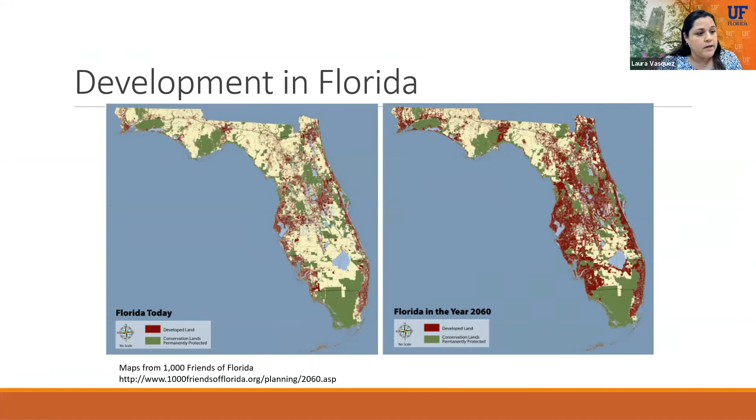Again, in Miami-Dade our water comes from the Biscayne Aquifer. It starts here at Lake Okeechobee and runs underneath the ground, and there are about 3 or 4 counties that share that same Biscayne Aquifer — I think it's part of Palm Beach, Broward, Miami-Dade, and Monroe. We send water to Monroe, and we ship water to Miami Beach and also to Key Biscayne.

So that's important because if we're not able to refill the aquifer, then we have issues with water, having the availability for water for us to use to drink.

In Florida, we have about 50 to 60 inches of water, which is about 4 to 5 feet of water. So this, sometimes I always have this question, well, why do we need irrigation if we have so much water or so much rain every year?

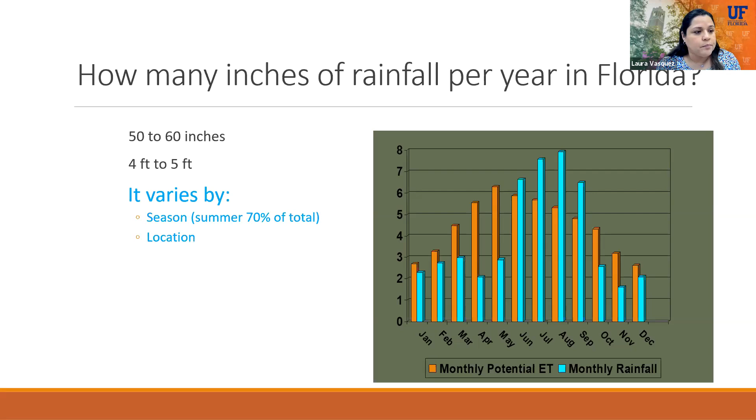Typically, we do very well in the winter. Lately, it's been raining. Even the last couple of days down here in Miami, we've had some rain. But our worst month is in April. So right before the rainy season is when we end up dealing with a lot of drought issues.

Last year, the South Florida Water Management District did determine that we were in abnormally dry conditions near Miami-Dade County. So this is when we have most of the clients coming to our program because their landscape is showing signs of stress.

But if you're watering your grass or your landscape appropriately throughout the year, your turf and your plants will overcome the drought situation a lot better if you're watering appropriately.

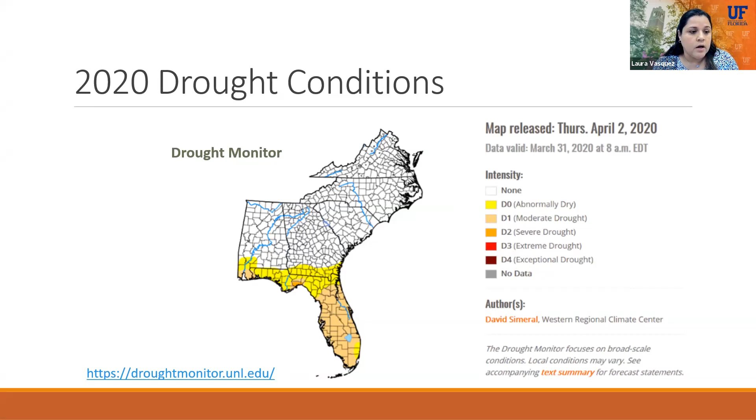Again, this is an issue that happened last year. They do end up giving us stricter rules when we end up in drought situations. Here, they actually changed the time that we were allowed to water during the month of April.

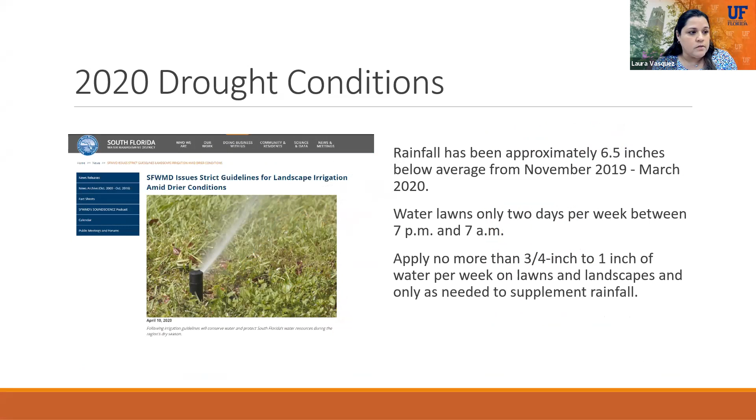But all this can be compensated, if, like I mentioned, we're doing the right practices or using best management practices with our irrigation systems, then that's something that we shouldn't have to be too concerned about.

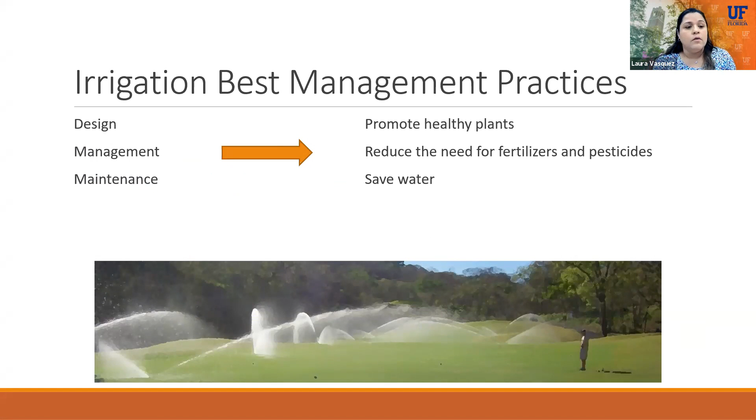So the 3 things that we're looking at is design, management, and maintenance of your irrigation system. These 3 things will help you promote healthy plants, reduce the need for fertilizer and pesticides, and it's going to save you water in your landscape.

We're going to go a little bit into each type of sprinkler. What I want you to note is the amount of water or inches that these sprinklers put down. So these are your typical sprays, which you should use in your bedding plants, and those typically give about 1 to 2 inches per hour. They are affected by the wind and evaporation.

Your rotors give about 1/2 inch to 1 inch per hour. These are more efficient. They do have larger droplets, and they're used predominantly for turf areas.

The issue here in Miami-Dade, when we go out and do irrigation assessments, is that we typically see both of these sprinklers in the same zone or in the same section. And why is that a problem? As you can see, if we go back, your sprays again are giving 1 to 2 inches per hour, and your rotors give about 1/2 inch to 1 inch per hour.

So what happens when you have those 2 in the same zone? You don't have equal application rate, right? So one is giving more water than the other. Typically, your rotors need about 30 to 40 minutes to put down a good 1/2 inch. And if you're running your sprays at the same amount of time, you're gonna be applying too much water where your sprays are located.

This is a multi-stream nozzle. These apply water very similar to a rotor. Their performance is more efficient, also with low pressure, and they have less wind deflection.

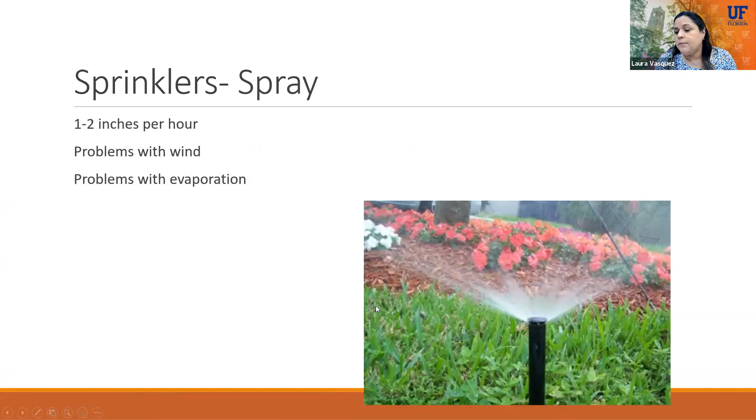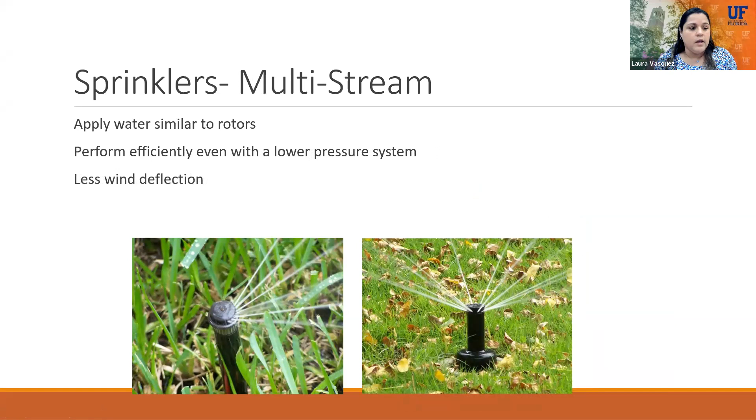The reason being is because these apply water similar to a rotor, so it's good to have them in the same zone if you know that it's a cost-effective way to replace the sprays in your irrigation system.

Micro sprays, we put this in here. Typically, these are not seen a lot in home landscapes, except for maybe your vegetable gardens or in your orchards. But it's important to point out that micro sprays give out gallons or inches per hour, so they apply differently from your spray and your rotor. When you have them in the same zone, you have to remember that they're giving out different gallons per minute as well.

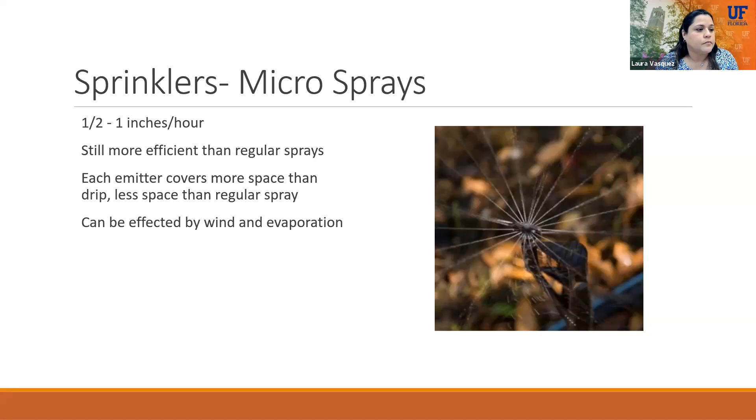So this is your typical drip. A lot of contractors or landscapers, especially down here in South Florida, are not too happy with homeowners installing drip, because if you are using well water, they tend to clog. But we recommend drip to be used more as a temporary irrigation. They're more efficient because they're giving water directly to the root zone of the plant. It also does gallons per hour instead of gallons per minute, which is what your sprays and rotors give. They do have issues with clogging, and again, it's temporary irrigation. If you're using plants that do very well in your climate or county, they should be well established once you get the drip in and water them with it, and then you're able to remove the irrigation, and they should do well in your area if you're using the right plant in the right place.

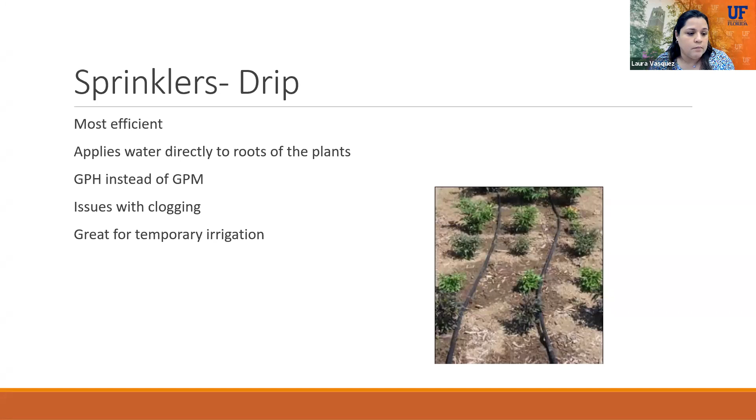So drip versus soaker. These we tend to see a lot in landscapes, and there is a big difference. Your drip, like I mentioned before, gives water directly to the root system. Your soaker kind of sweats throughout the entire length of the tube. But when the pressure is really high in your system, it gives out a lot more water than what's indicated on the manufacturer specification. So it's important to know how much pressure is running through the system so that you know how much water is coming out. The drip is a little bit more efficient, I believe, than your soaker hose.

Pressure regulated spray heads - Dr. Dukes has done research on pressure regulated heads. When you install these bodies or body types in your sprinkler system, they tend to keep the pressure regulated throughout the zone, which allows for water saving. Based on his research, testing the pressure regulated spray sprinkler bodies resulted in a flow rate reduction of 10 to 24% at 1.5 gallons per minute. So it's important to have the bodies of the sprinklers regulate this throughout the entire zone. The more sprinkler heads you add in your zone, the more you're reducing the pressure in that particular zone. These heads will allow you to keep the pressure regulated throughout the whole section.

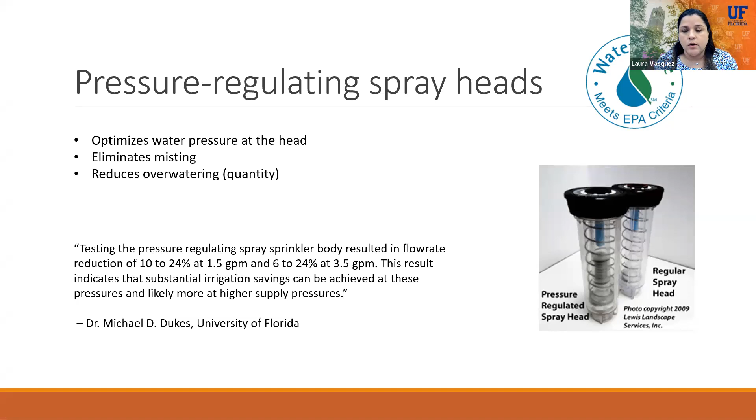So what's wrong with this picture? Now that we've talked a little bit about it, can anybody tell me, maybe in the chat, what's wrong with this photo based on some of the things we talked about in the previous slides?

Yes, overlapping sprays is one, because they're watering the same section - mixed sprays, overwatering, overlap, watering sod and trees. Yeah, that's a good point. There's mixed plantings, and different kinds of heads. So again, different head output in the same zone. Exactly, Terry.

So what we're looking at here is that the rotors and the sprays have different application rates. If you're running this area to water the grass for 30 to 40 minutes to get a half inch, which is what Dr. Dukes and the university recommends - half an inch of water every time you water - you're going to run this for 30 or 40 minutes to get the half inch in your grass. But these areas where you have these sprays could give out double that amount, and it's also overlapping and watering the same area. So you don't want to do that. You want to make sure that you have your sprinklers watering the area that's needed.

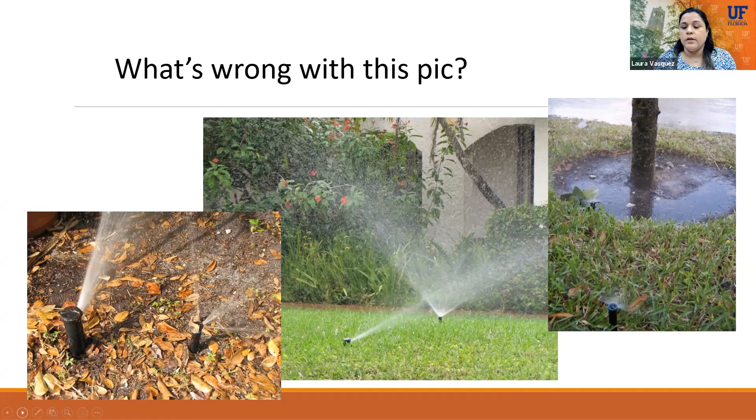Okay, so here's another review question. Can somebody tell me what's the difference between your spray here and your drip irrigation here? What was one of the biggest differences between your sprays and your drip or soaker hose? Output, correct, Stacy - output amount. Again, we're talking about gallons per minute versus gallons per hour. Smaller droplets, that's true - the sprays have smaller droplets, so you have more wind deflection. Drip is more efficient; it's giving water directly to the roots.

The main point is that you have different amounts of water being given out per minute versus per hour. If you're using sprays correctly in your bedding plants, which you should, and run them for about 10 to 15 minutes, these heads can typically give out 3 to 5 gallons per minute, which should be sufficient for that area.

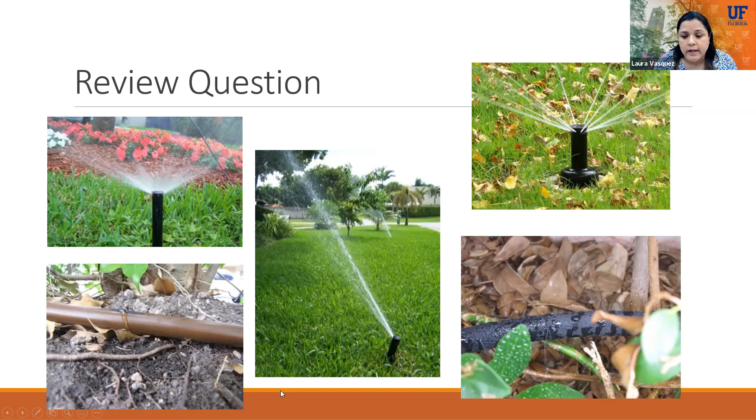However, if you have drip in the same zone, these give out gallons per hour - maybe 1 gallon per hour, or 3 gallons per hour. So then we're going to have an uneven application rate within the system. It's important to know what type of sprinklers you have, how much they're giving out, and at what rate they should be performing at their maximum.

Irrigation zones should be based on plant types - as we mentioned, these are called hydro zones. Your grass should typically be on its own section since it needs the most water. Your shrubs, trees, and ground covers, once established, don't need that much water. Maybe in April here in South Florida, during a really dry season, it's important to give them just supplemental irrigation. But if you're using the right plants in the right place, and plants that are Florida friendly, they should be able to deal with drought conditions, especially a mild drought.

Another point to make is when you're installing or designing your irrigation system, you need to look at what you're watering in that particular area.

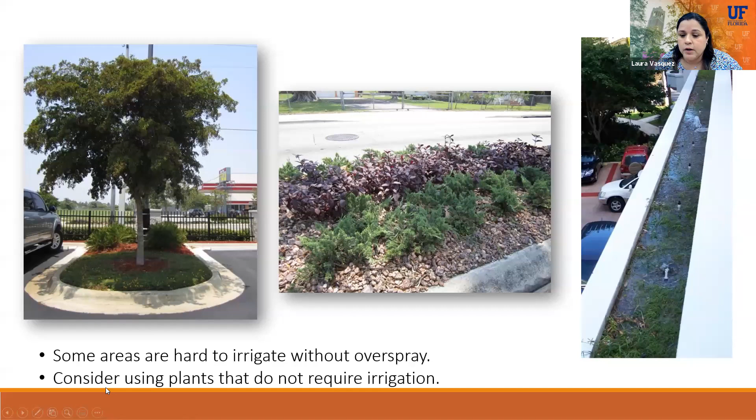So it's important to know: do we need irrigation here? Are there plants you can put here that could be established with just a drip system, where you tie into maybe one of the heads, run a drip line, get them established, and then you don't have to worry about watering that area. Some areas are hard to irrigate without overspray, so consider using plants that do not require irrigation.

Also, another great point - when designing your irrigation system or making changes to it - is to make sure you have head-to-head coverage, meaning the water from this sprinkler should reach the other on the other side and vice versa. You should have an overlap of water within your sprinkler systems, because this provides better uniformity in your system.

You could do triangle spacing or square spacing, and you want to make sure you have matched application rates throughout the zone. So if this section uses heads putting out 3 gallons per minute at, let's say, 30 PSI - because that's what your system is pushing out in that zone - all the heads here should be comparable. They should be the same type of head, just with different patterns if needed. If an area only needs 180 degrees instead of 360, the patterns can differ, but making sure you have matched application rate is very, very important.

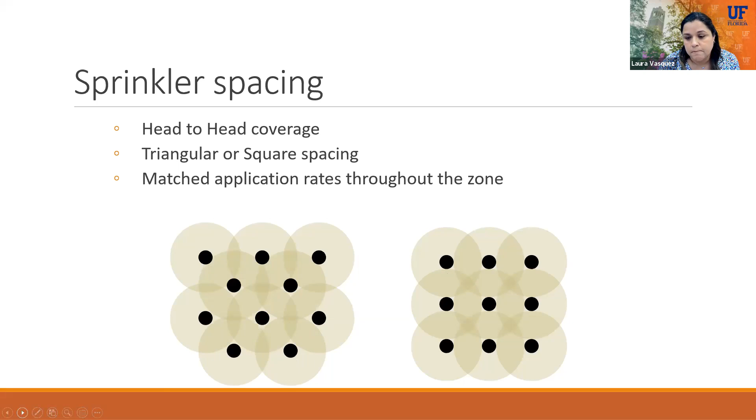Sometimes when you have a broken head, you think, oh, I have a spare in the garage, or your landscaper says they have one in the vehicle and just replaces it. Sometimes that can cause more damage because it could be a head that's not suitable for that area. So it's very important to know what head you're replacing in that particular area.

So what we want is a uniform system, or uniform application of water. These are just different examples.

This happens when you don't have proper spacing or you have maintenance issues. You have plants that are receiving the appropriate amount of water, but then you can have a plant here that's not receiving enough. That could be due to uniformity, design, or maintenance. What we're shooting for is to have adequate irrigation in the root zone of your plants.

So if you're watering 2 days a week, at least in South Florida, and you're shooting for that half inch every time you water, that should be sufficient for your plants and even your grass. A lot of homeowners don't believe us when we tell them that should be enough for your grass, but it is basically enough. It will be enough for what your grass needs.

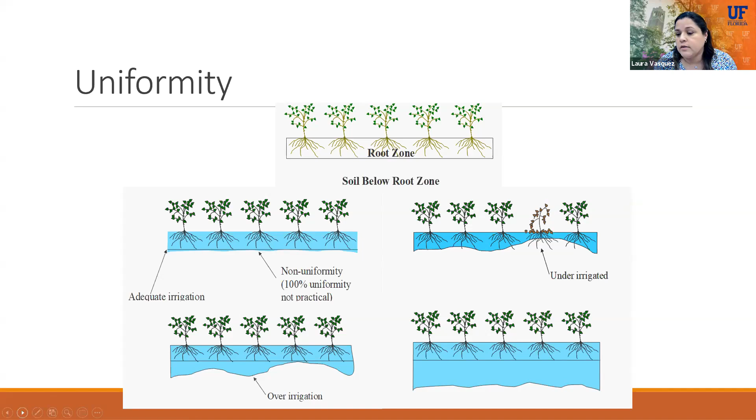So this is just an example of bad design. Typically, some homeowners will see a dry spot, and instead of checking the irrigation system, they just put more time on that particular zone. I've asked this question to many homeowners: when you see a dry spot, what is it you do? It's like, well, I'll go to my controller and just give it 10 more minutes because I know that area is dry. But it could be a bad design issue.

Here's an example. It could be an issue with uniformity because of pressure, or you don't have enough pressure in the line. This is a study that was done at the university showing the issues you have when you don't have enough pressure and the areas are dry, and when you don't have head-to-head coverage.

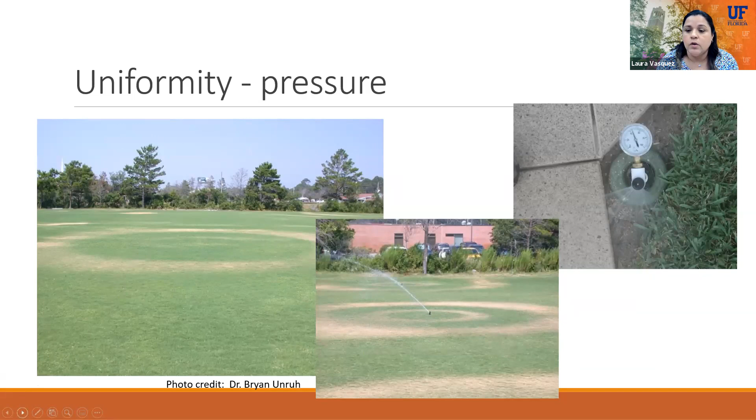The other issue could be with uniformity, or could be maintenance. A lot of times your sprinkler heads pop up, and sometimes they don't pop back down. So your landscapers come with the mower, and instead of pushing the heads down before running the mower, they just run over the sprinkler heads. A lot of the mowers or landscapers don't want to get off the mower to push the heads into the ground, and that starts to cause a lot of issues with maintenance.

So this area here that's dry is caused by this sprinkler that's not properly applying water because it was damaged during one of the routine maintenance visits.

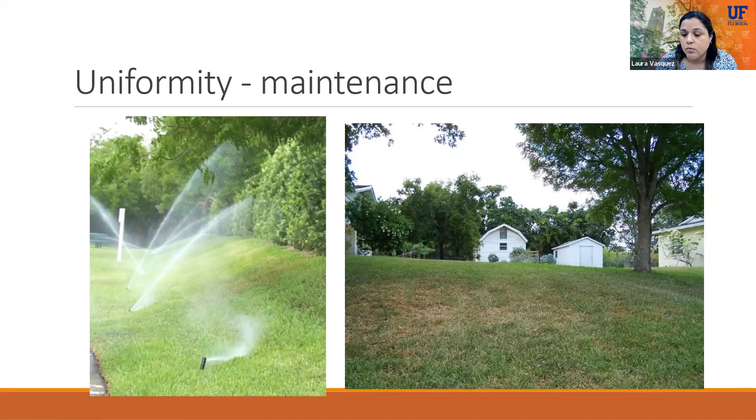So the important thing there would be to always try to do a wet check. Before you decide to turn on the irrigation system, or before you decide to turn up your irrigation system for more time, it's always important to do a wet check. You want to turn on the irrigation system, walk the zones, and make sure that you have proper coverage. How you can do that is by doing this typical or basic catch can uniformity test.

This test will give you two pieces of information: one, whether your system or layout has uniformity, and two, your application rate. If you don't have any cans, and you have cats or like to eat tuna, you can save the tuna cans or cat food cans, and place them within an area, ideally near 3 or 4 sprinklers, and run that zone for about 15 minutes.

After those 15 minutes, you're going to go back out and measure the water in each can. You can either use a ruler, or if you have a beaker or measuring cup at home, you can measure how much water you're getting throughout the system in that particular zone. If you have more water in one area, closer to the sprinkler, and not enough water on this side, it could be an issue with head-to-head coverage. You see here, there's only one sprinkler on this side, so you're going to get more water here versus on this other side. So you would see that you don't have uniformity in the system.

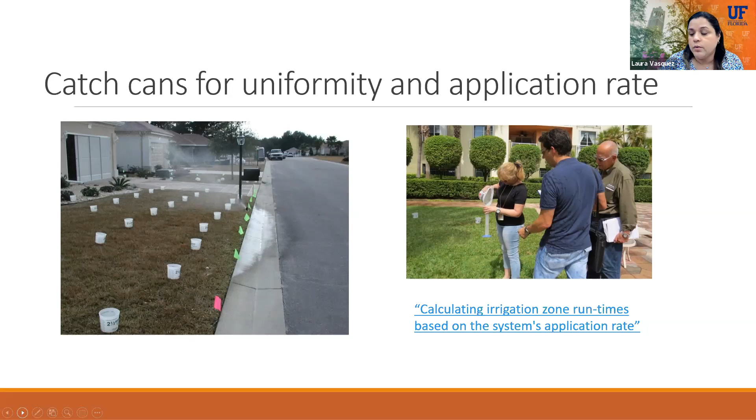This test can provide you both pieces of information. We have a YouTube video filmed by Michael Gutierrez, who now works at Broward County, and Mary McCready put together this video that can tell you how to calculate your run times for your irrigation system when you're doing a catch can test. I'll send that link out for you to watch as well. That will help you out.

So irrigation management, what's important to know? Well, you want to know the system, you need to know your plant requirements, application rate is important, and routine maintenance. Everything needs maintenance, even a Florida-friendly landscape needs maintenance. Having a Florida-friendly landscape doesn't mean having no maintenance, it's just low maintenance. Everything needs maintenance, even your irrigation system.

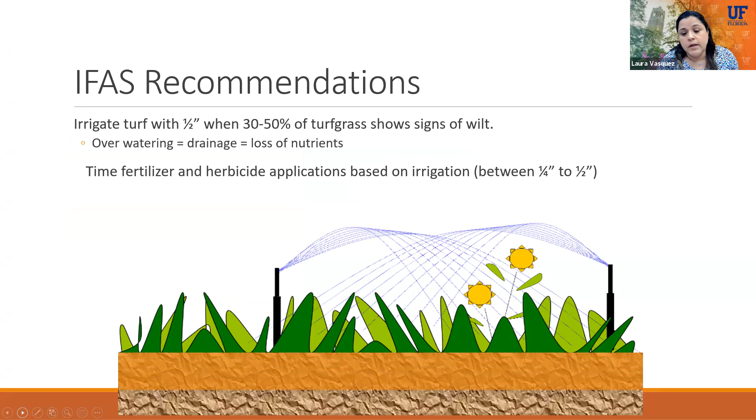Based on IFAS recommendations, you're looking for that 1/2 inch of water for your irrigation system. When 30 to 50% of turf starts to show signs of wilt, you want to make sure you're giving it that good 1/2 inch that it needs. It's really important not only to calculate the irrigation time based on that 1/2 inch, but also to know the soil type of where you live.

In Miami-Dade County, I'm in Homestead. The soil here is very rocky, very loamy. So you wouldn't program your irrigation system the same amount of time in Homestead as you would in North Miami, because North Miami has sandier soils. In Cutler Bay, just east of us, they have very mucky soils. You have to understand the water holding capacity of your soil, so you're not going to run your irrigation system for the same time down here as you would further north, because the soil doesn't hold the same amount of water.

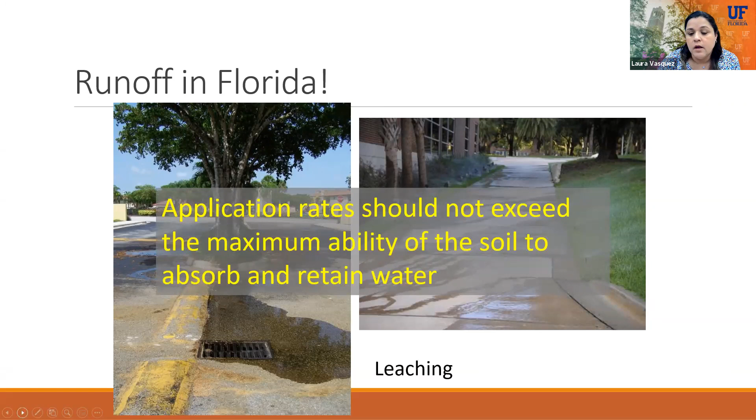Leaching is very important. It's important to know how much water your soil can hold before it starts to run everything off, because there is no filter from our irrigation systems running into our drains and out into our bays and our drinking water. So it's important that you're applying the appropriate amount so that we don't have major runoff.

So what are other ways to determine your application rate? You can install a smart controller. That would help you with your application rate. We'll go a little bit into that.

We have our FAWN weather station. If you have a basic digital timer, you can always use the FAWN weather station and put in all the information of your irrigation system, and it will send you a report with current rain conditions on how you should be running that irrigation system.

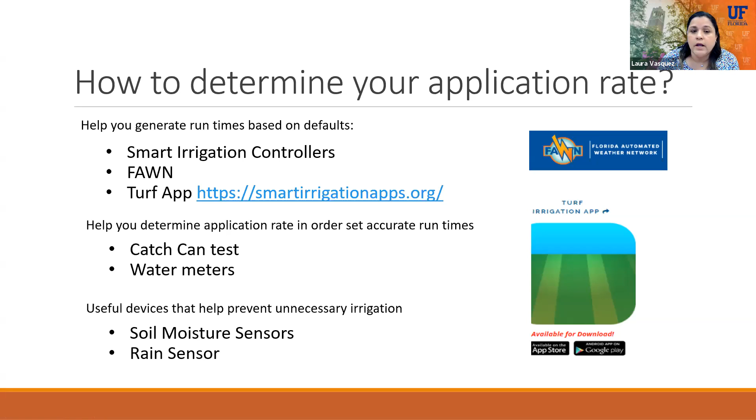The university also has a turf application you could use, which you can download on your smartphone. Again, we talked a little bit about your catch can test. You can use your water meters; if you have a sub meter, that can help determine your application rate as well. Other usable devices are your soil moisture sensors and your rain sensors. We'll talk about a few of these in the next coming slides.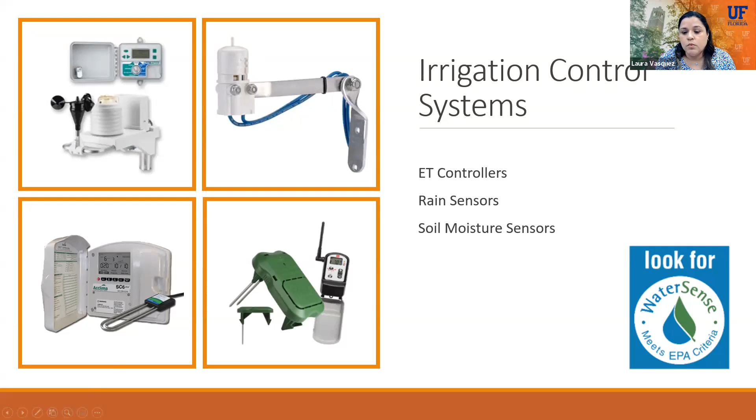These were our original smart controllers or ET controllers that came out, which are standalone units. They get the information of what's going on at that particular property in order to apply adequate irrigation run times. So it takes temperature, it takes information on how much it's rained, and it starts to calculate what it should be running that particular zone for.

But with everything going smart, we now have these smart irrigation controllers that run on Wi-Fi. I kind of like the older models where they're standalone units and tell you exactly what's going on at your property, because in South Florida, we have a lot of issues where, like, my mom would call me.

My mom lives like 10 minutes down the street from me, and she's like, oh, it's pouring down here. And I'm like, what are you talking about? It's very dry here.

So if these particular smart controllers get information from local weather stations - this one is your Rain Bird, and it has this link module that needs Wi-Fi access to read from the weather stations back into the timer, as does Rachio, Hunter, and these other smart controllers that are EPA certified. However,

we want to test them as well to see how accurate they are in South Florida. I know Dr. Dukes has done research with them in Gainesville. The other issue we've run into is actually having access to Wi-Fi. The larger properties have those issues because homeowners can tie into their Wi-Fi at home, but when we deal with large properties like homeowner associations and commercial size properties, like some warehouses down here in Miami that want to join our large property rebate program, which I'll talk about a little later, they have issues getting connectivity or getting Wi-Fi to that system.

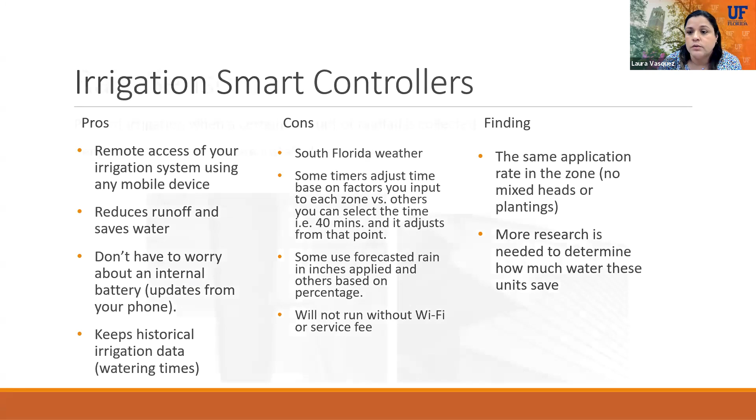So I talked a little about rain sensors - these are mandatory to have in your irrigation system, but it's also important to locate them in the proper place. You don't want to put them, say, on the overhang of your home where you're not getting any water. They need to be out in the open where there's no trees, nothing covering it, so you can get the rain and make sure you're not overusing your irrigation system.

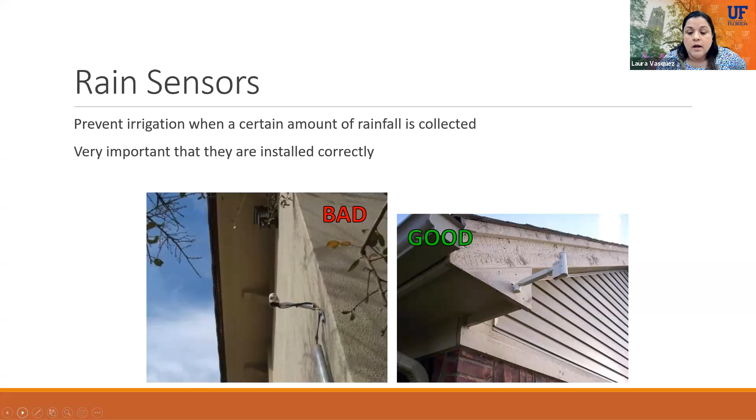The rain sensor will shut off the system - it will not allow the system to come on if there's that good half an inch of water in the corks inside the rain sensor. These now come wireless, which is great, because before they would have to run a long wire to your controller to make sure you could locate it in a proper location. But now they come wireless, so you don't have to worry about paying that extra money to your landscaper or irrigation contractor to install these, because they're wireless now.

So these prevent irrigation. They don't allow irrigation, but they prevent it from coming on. This is an old mechanical timer. This is still what we're seeing out there in a lot of the new developments.

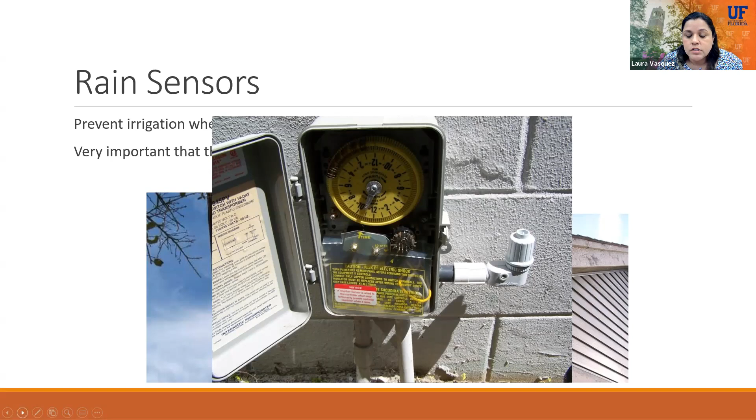Hopefully we can move over to requiring the installation of smart controllers with new development. I think Alachua County is working on that, starting some requirements for new development to have a smart controller versus these mechanical timers, which are a lot cheaper, and the developers don't want to pay for the smart controllers.

So we talked a little bit about soil moisture sensors. This is just a little rundown of how these work. You would put the soil moisture sensor in the ground in the first 6 inches of the soil. Again, they work similar to a rain sensor, but these are more effective because it's telling you exactly what's in the ground and in the root system of your plant.

So you install them in the ground. You would put a bucket of water over the soil moisture sensor so it can get a good reading of how much water it needs to hold in that particular soil. Then you get your rate of what your water holding capacity is.

In the morning, let's say you had a sunny day and it's been sunny for the last couple of days. The timer that you see here will send a signal out to the controller for the soil moisture sensor. And if it's really dry, then this latch will stay closed and it allows the water to come through the valve and out through your irrigation system.

However, if it's been raining and there's enough water in the soil, the timer will send a signal out to the controller for the soil moisture sensor, and it will not allow for contact in the irrigation system to run through the wiring and allow for irrigation. So that's kind of how these soil moisture sensors work. These are a lot more precise to me versus the rain sensor, again, because you're seeing what's going on in your soil in that particular property.

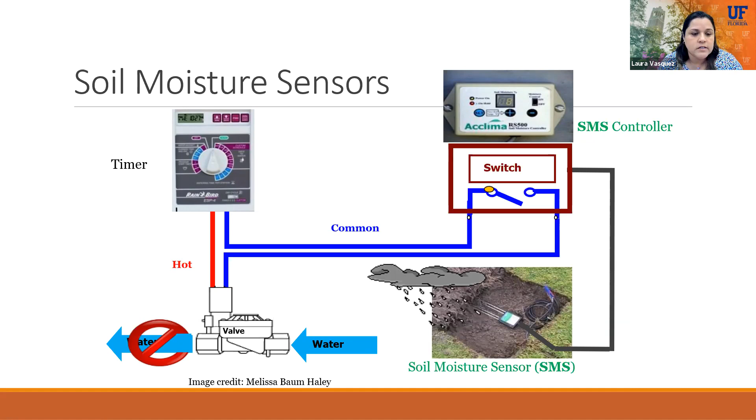Okay, Douglas says open fields, open area without trees. Brian, that's correct: turf, driest place in the landscape. That's right, in the driest place of the landscape. Why? Because if it's dry there, then you know that when the irrigation system comes on, it's going to be based on the driest area. So you're correct, thank you guys for responding. Equal distance between two heads... let me think. Yes, Terry, it is in the area that is the driest of the irrigation system. Basically, it would be best to have one in each zone to give you a good idea, but that's a little bit of an overkill if you're just doing it mostly for your turf. But definitely it would be in the driest area.

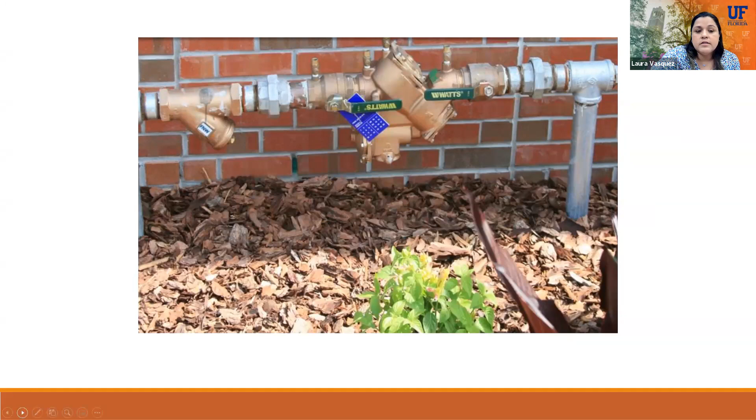This is a backflow preventer. These are mandatory in your irrigation systems that are well water systems, not potable systems, but for well water irrigation systems. You have to have these backflow preventers. These prevent contamination and going back into your well water.

For those of you guys that are working with electricity, it's very important. This happens a lot: every time we go out to look at valves, a lot of these electrical valves are flooded with water. You have to remember you're working with electricity, so it's really important that you guys are using these DBY connectors. They have grease inside these tubes so that you are being safe working with wiring if you're doing the work yourself.

Or even if you're going in there to try to turn some of these on, your indexing valve, which is the old valve that turns into your different zones—this would replace that indexing valve. But if your timer were to go out, you can turn on these electrical valves one by one to turn on your different zones. So if you're in there trying to turn one on by hand, you want to make sure that you're protecting yourself and not dealing with live wires.

Isabel said we have a lot of that on our community property. Yes, I can imagine so.

That's another reason why it's important to do wet checks. Yes, you're relying on your landscapers and your irrigation guys to do a lot of the wet checks and information like that, but it's good to be involved in what's going on. I know it's difficult sometimes, but just so that you can see that the wet checks are being done properly.

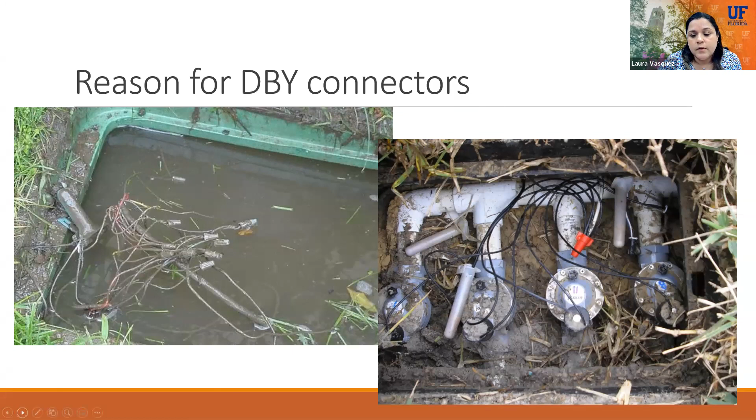Throughout your irrigation system, again, making sure that you do maintenance on your filters. A lot of the water, like I mentioned here in South Florida, we have a lot of calcium in our water, so it tends to clog up a lot of the irrigation system. And if you're not cleaning out your filters, that's going to cause an issue.

Typically here, whether you have municipal water, you really don't need the filter for that, but again, groundwater, surface water, we do have some people here in South Florida that use lake water or tap into the canals. And so that brings a lot of debris with it, and you don't want it to clog up your sprinkler heads.

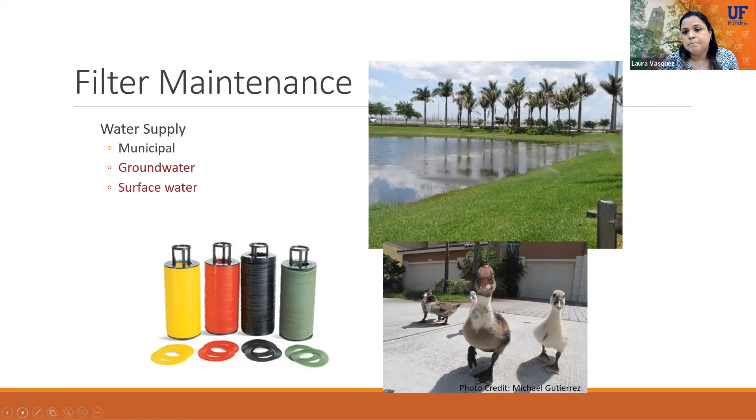So you want to make sure that you're using appropriate filters and making sure you wash them out. I've gone to a lot of properties where the filter, you can't even see the inside of the filter. It's completely clogged. So again, it's not serving its purpose if you're not going in there and washing them out.

Again, maintenance is a big issue. You want to make sure, again, if you have your company doing a wet check, it's important to walk your irrigation system. If you're a homeowner, just turning it on once a month, checking the zones, making sure that you're applying water appropriately and that you don't have any broken heads.

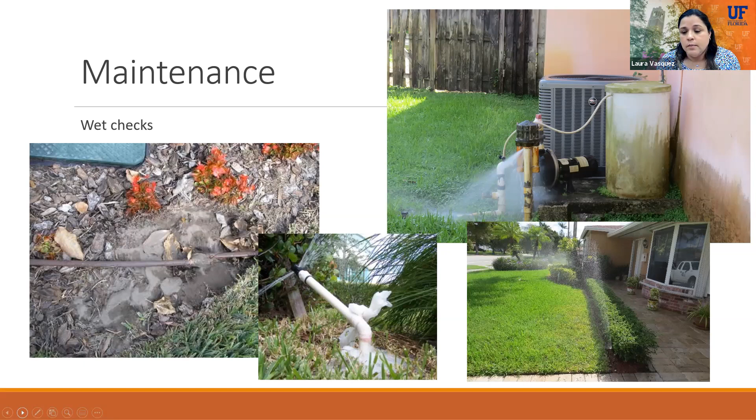Again, making sure that you replace or repair any broken lines right away. This happens a lot with drip, which is another reason why a lot of homeowners and landscapers are not too happy with drip, because if you have them above the ground, sometimes the landscapers come through, or by mistake you can run the weed whacker over it, and then you end up having a lot of breaks in the system. So it's important to do regular maintenance because it does save water, money, and your plants in the long run.

So I talked a little bit about us conducting irrigation assessments and going out and looking at properties. We have a program here called the Landscape Irrigation Rebate Program. Basically, we have homeowners who sign up for our program. We have a program for large properties and also single family homes. These single family homeowners sign up to the program, and we go out and do an assessment of the irrigation system.

We take a look at ways that they can make the system more efficient, and then we send them a free report. In that report they can review the findings. We will do a walkthrough with them on site and also talk to them about their plants and how the plants and irrigation work together. Once we give them the report, they decide what changes they'd like to make, and they can get a rebate of up to $500, depending on what they change in their irrigation system.

For large properties, their rebate is up to $2,850. But the stipulation for that program is that you have to install a smart controller. You can't do anything else if you don't install a smart controller into that irrigation system. I wanted to show you all the different counties that already have this type of program. They're not all the same. It all depends on what your utility company, their partners, or their funding agencies require them to do. So every program is a little different, but there are many programs throughout the state.

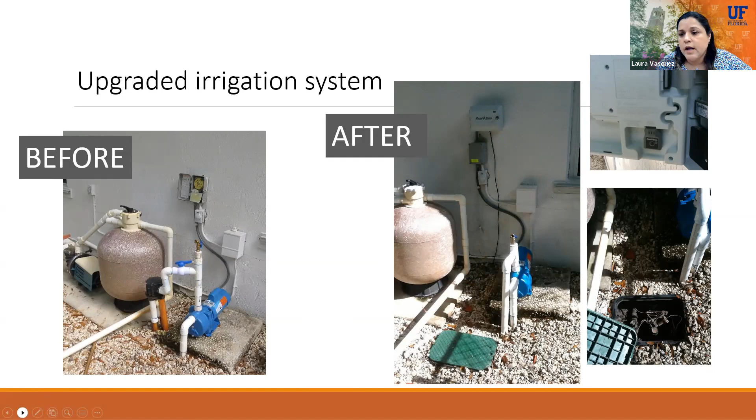So it's not smart without it. So you'll need to purchase that separately. So it's important that you know what makes your timer smart. It's important to research these controllers before you purchase them, or ask your local extension office. They should be able to assist you with some of that information. So this is just a typical before and after, but I also wanted to talk about our large property program.

Gutierrez, Rainbird products also require the WR2 wireless rain sensor to be considered weather-based. So yes, Mike, you're right. So Rainbird products also require the wireless rain sensor. So depending on your county, I think, is that for you guys, Mike and Broward? You guys are requiring that in order for the controller to be rebated in your county? That's correct. Okay, so in Broward County, in order for you to get the rebate, you need the Wi-Fi link, the link module that's inside, and the rain sensor in order for you to get the rebate with that controller.

So we did a study with Fisher Island. I don't know how many of you guys are familiar with Fisher Island. This is an island here near Miami Beach. It was a two-phase project where we converted all of the timers on this island, except for the golf course. The golf course is still pending.

But they had, I'll show you the controllers that they had. Let me see if I have it in the next picture. No, I don't have it. Okay, so they used to have these old timers from Rainbird, and they switched over to this ESP-LXME controller from Rainbird. They installed a weather station there to run all these controllers. They didn't do anything on the layout. All they did was switch all these controllers to smart.

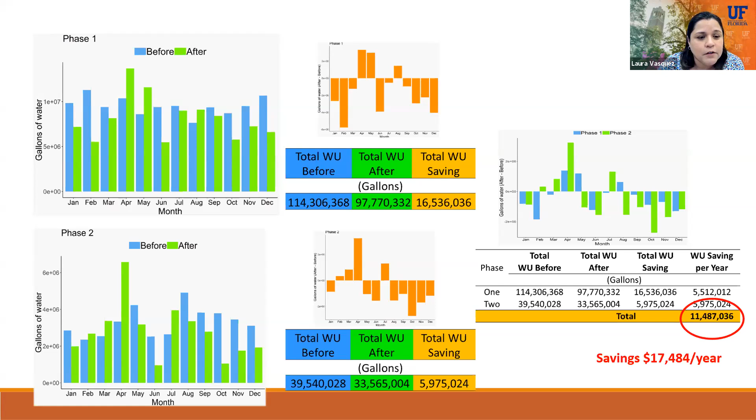Paulette said Fisher Island residents have enough money for anything. Well, I'll give you some insight - when we went to Fisher Island, they were actually in the red on their water bills, so this was a big help for them. They have a master association that works with their individual homeowner associations. The good thing is they now realize they're overusing water and are trying their best to conserve it. Also, because they're an island, anything they overwater on their lawn and landscape leaches out directly into the ocean. So they are making strides to do better - let's give them credit for that.